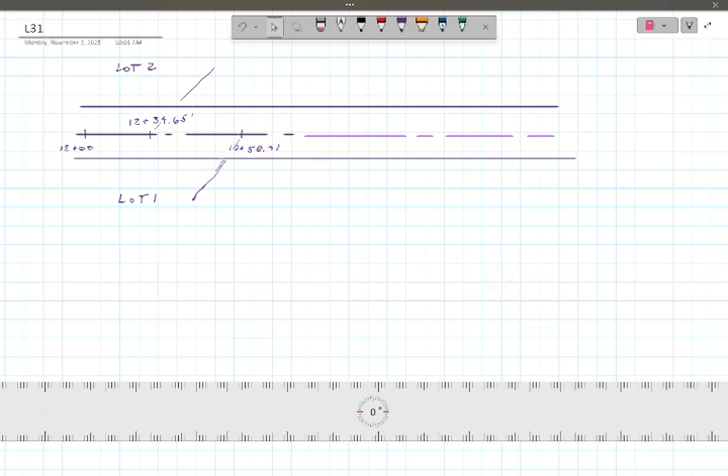Guess I can make that just a little bit bigger. Okay. And then somebody's going to shoot a point here. Where'd it go? This one is 12+34.65. Okay. And this one's going off in this direction, and this one's going off in this direction. This just happens to be lot 1. This one's lot 2, and so on down the way. And I do need to make some copies of that for you, and I will get some done. But generally, this is the building you're going to lay out. So we'll come back to the layout here in a minute. But we have this building that looks like so.

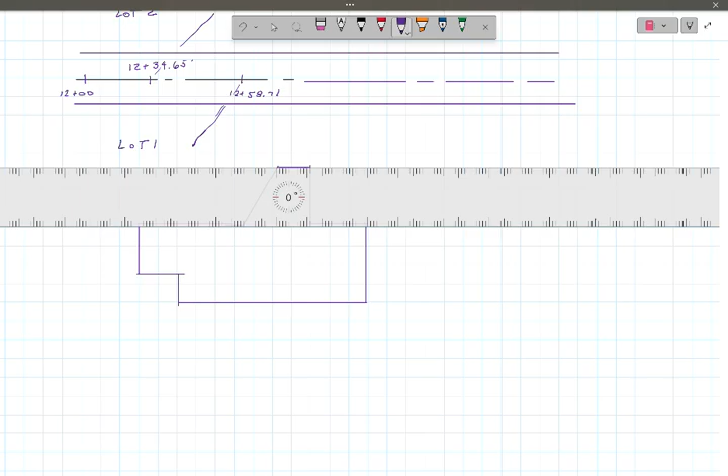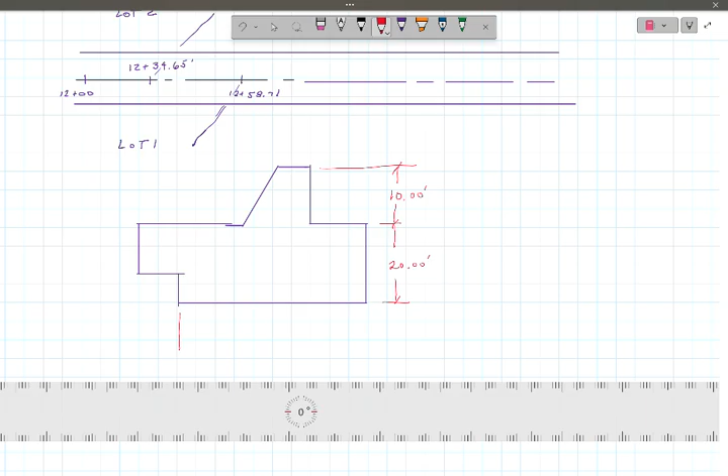Okay. So we got this building. I'll put the dimensions in red for you here. From this point to this point, 20 feet. I actually do it in surveying terms, 20.00 feet. From this one to here, 10.00 feet. Okay. Then we have 30.00 feet. And then we have 8 feet. Okay. Nope, sorry, this is 10 feet. Got my numbers wrong. This one here is 8 feet.

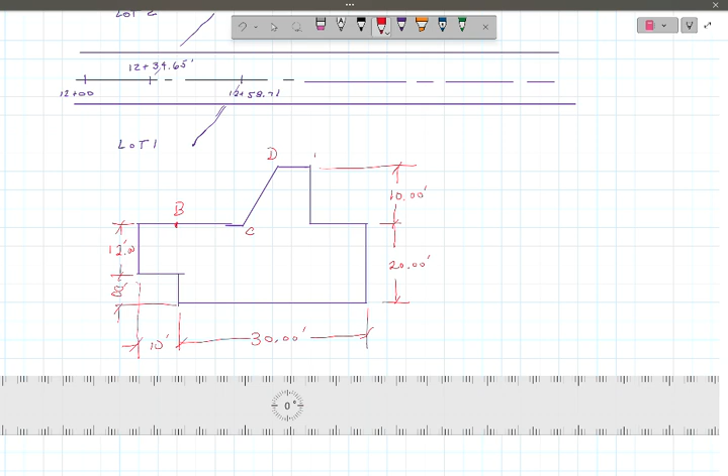And then we have 12.00 feet here. Okay. Then we got B located here. C, D, E, F, G, H, I, J, K, L. Okay. Now there's some really cool trig in here that you're going to have to do to get this all right. And that's what we get done today. I'll get you started. But by Wednesday, I want you to have them all laid out. I'll show you what I'm expecting.

What's that small angle under the 12, or not the angle, but like under the 12 on the left? Is that 8? Here? Yeah. 8. Yep. Okay.

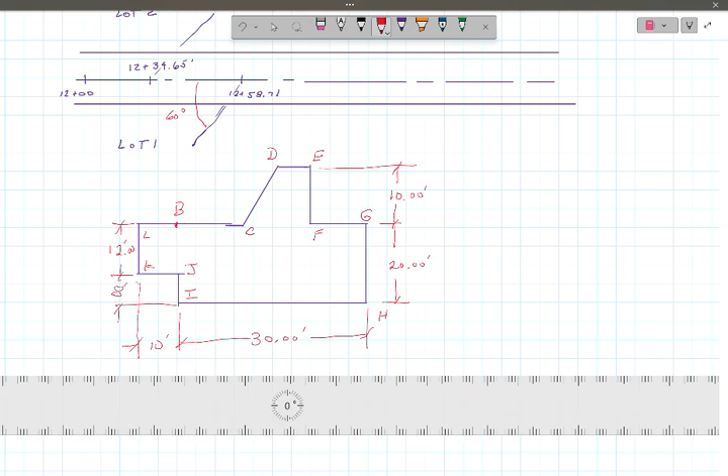All right, so here's the fun. The angle from our baseline to our road is going to be 60 degrees. Okay? If you're on the north side of it, your angle here will be 120 degrees. Okay?

Make sense? Okay. Well, each party is going to do one of the lots. So there are 6 lots you'll set up. You'll have 5 teams, so you'll do 5 lots and 5 parties. Okay?

You good, Josh? Yeah. Maybe you collapsed on me, Sierra. Oh, my nose was dripping. I'm a little sick, so I had to blow my nose. Just making sure you weren't on the floor, passed out with this monitoring.

So here's the fun part, okay? There are things you're going to have to get really good at doing the trig for. Okay? So for instance, I need to know the distance from D to E. Okay? I need to know B to C. Some of these I'm going to give you here in a minute. Okay? But the line distance from C to D, I don't know.

Can I figure it out? Luke's nodding his head slightly. How, Luke? That's where I was waiting for you to come in. Okay. You're just assuming that I'm telling you the truth then. Oh yeah. Cool. I love that.

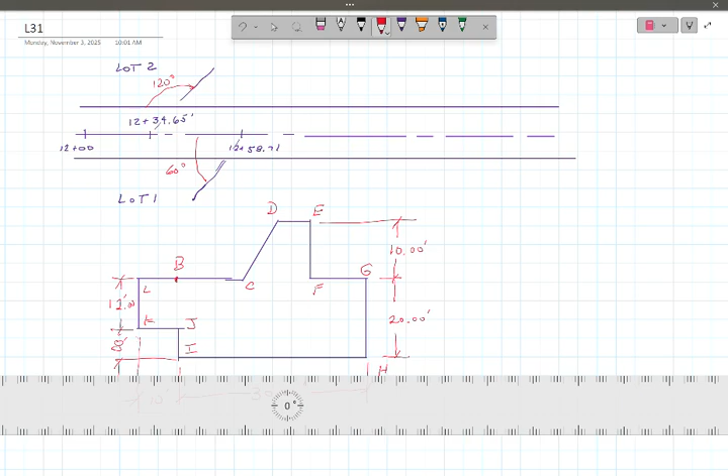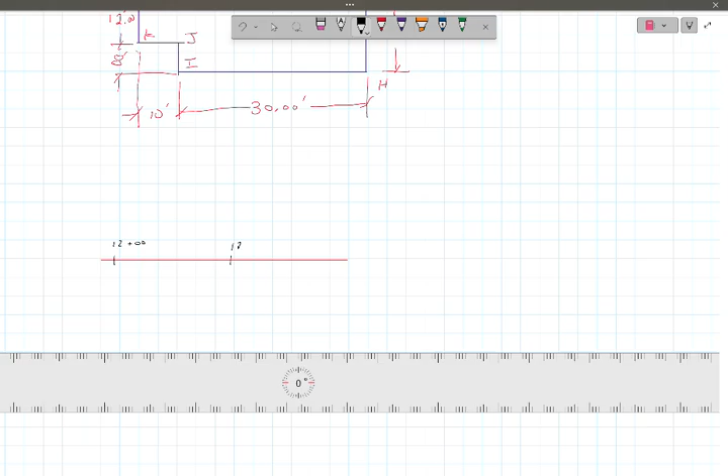Okay. So let me get the roadway back here for a minute. So we're going to put 12+00 on the road. Okay, you're going to measure over to 12 plus 58.71 if you're party number 1. Who's party 1? Okay. Can you handle that? By now, I'd hope so.

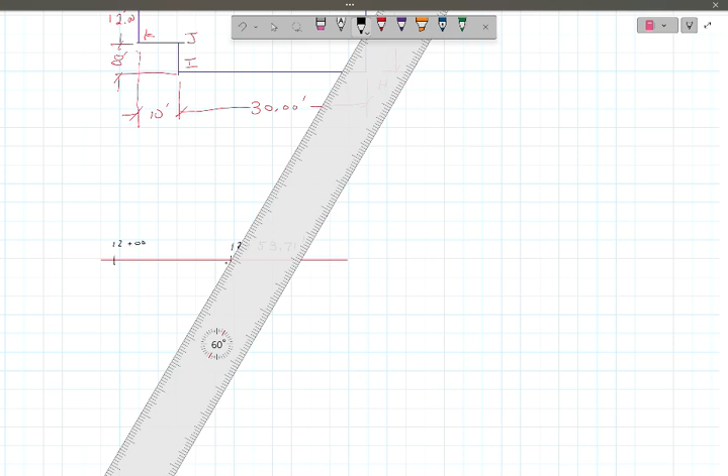You're going to go out and you're going to find that wherever you stuck 12 plus 00 on the road, there's a little pin there. You're going to measure straight back with a steel tape and get yourself offset by 58 feet and 7/10. Okay. All right, from there. From there, we're shooting, we want a 60-degree interior angle.

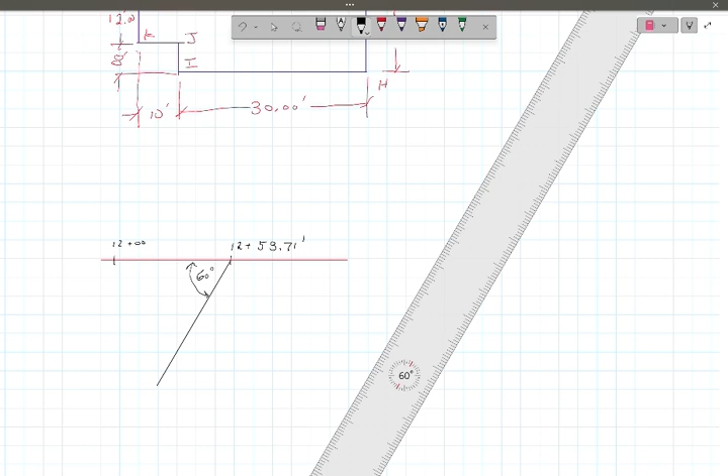Okay. It is the exact same thing. We're just getting a little more specific here. Okay. So I want you to remember, when you did the 60-degree internal angle, which way is the scope turned? Clockwise. I'm aiming here from 12 plus 58.71 to 12+00 to establish where the center line of the road is. What am I swinging? 300 degrees. Okay. But still 60 here, right?

Cool. Now, the building will sit down here. Okay. And this will be point B. So that's still 60 degrees. Remember your geometry from high school? 2 parallel lines with a bisecting line, all the interior angles are still equal to each other. Maybe that's not the way it was phrased, but roughly the meaning of it. Okay. In my world, it's still equal to each other.

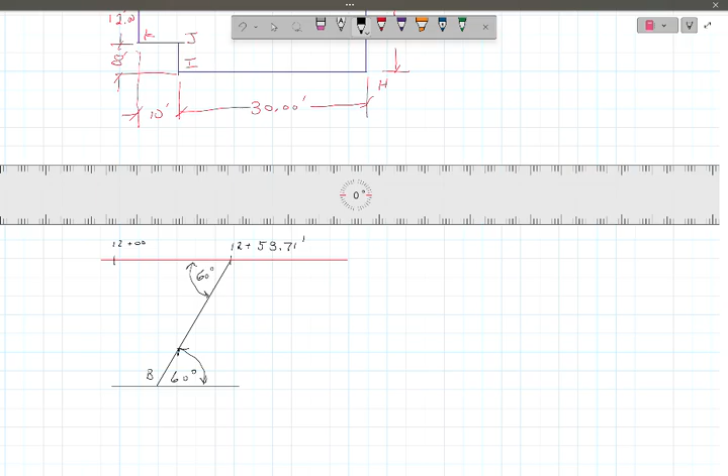Okay. But you're going to shoot from 12 plus 58.71 to B. And you're going to get an azimuth equal to 300 degrees, 0 minutes. And that is, I'm going to put it down as station B. Okay? And that'll get you off the roadway. All this little bit needs to be accomplished before 3 o'clock.

Seriously, come Thursday, 3 o'clock. What goes on up at the hill at 3 o'clock? You've heard me say it many times. Facilities leaves the campus, right out that access road. Okay? Don't want to get in their way. So, get your gear and get out of here.

Okay? Now, the other bit is this. So, you need a distance. So, from that point, all the offsets from the center line of the road are 35.80 feet. So it doesn't matter which party you are, you're going to establish that point. Yes? Is that like an odd number because it's a diagonal line instead of a straight offset? No, it's just a number that somebody picked years ago and we keep using.

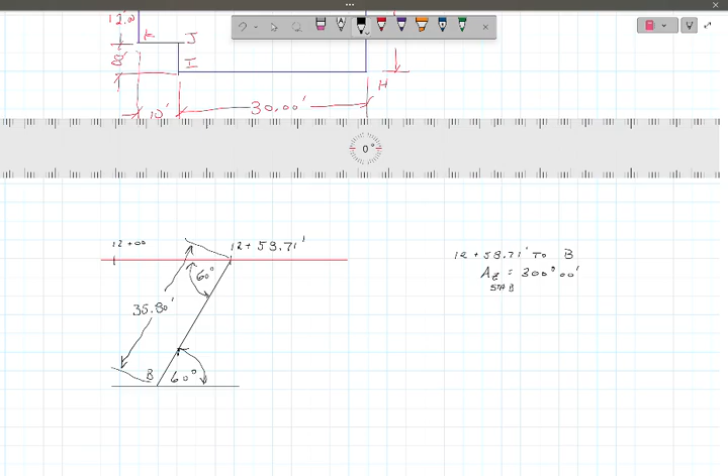With me so far? So we're going to back shoot to here. Pin's in the ground, we're good. And you're gonna back shoot to that pin. Then you're gonna zero, shoot 300 degrees here. That'll give you the 60-degree interior angle that you're looking for. You run a line or a tape out 35.8 feet on that line. Drop a stake at B. There's some little details we'll work on how to drop stakes properly out there. So that becomes our new site.

Now we're literally going to go move our instrument to B, because everything else after this is coming off B. But in order to establish B to A, and this was A up here by the way, I have to do a backsight to A. Set that as my 0. After that, 60 to this one will get me over to C. Step 1 complete. A is off the road. A is up here. Yeah, I should write A up here. A is your station that you're looking at here.

So if you wanted to, this is azimuth A to B is 300 degrees, given that this is your baseline, and that's established at 0 degrees, 0 minutes, 0 seconds. Now, there's a few games that we can play here. We could have put you on the point, find your magnetic north, create your azimuth at 0 there, and then swing. But it's easier if you know the line that you're going to be parallel to, to keep the front of the building parallel to the center of the road. Okay. Cool. Everybody good on that point?

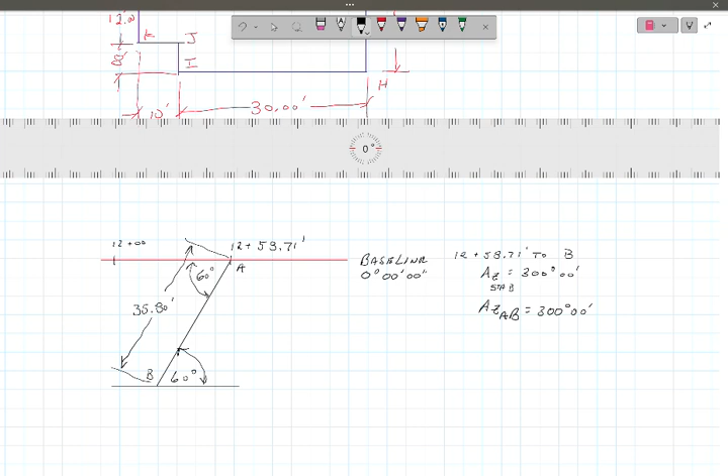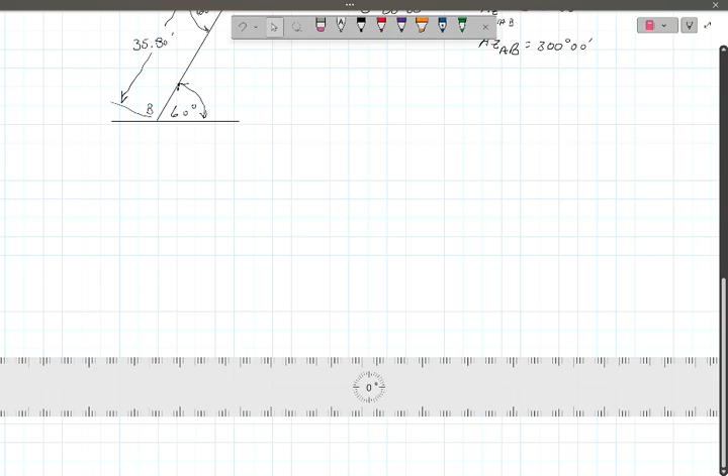All right. So that was basically establishing B to A. Now we have the next piece of this puzzle. Oh, and by the way, the azimuth B to A winds up being re-zeroed as your 0 now. And then everything else we're going to do after that comes from there. When you shoot 300, you're locking the horizontal on the total station. Are you moving the vertical so it touches the ground? Yeah, that's how you're just moving to that point. We're not looking at vertical angles or any of that stuff yet.

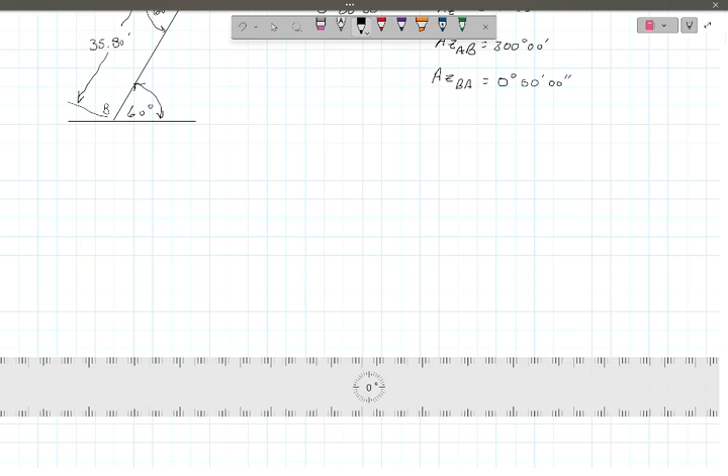Looking at the scope, put the crosshairs on the PK nail that's established out there. He'll have them put in the ground, and then there's white paint on them. And if the nails haven't moved from last year, they're still there. All right, now we got to look at how to get to the next measurement.

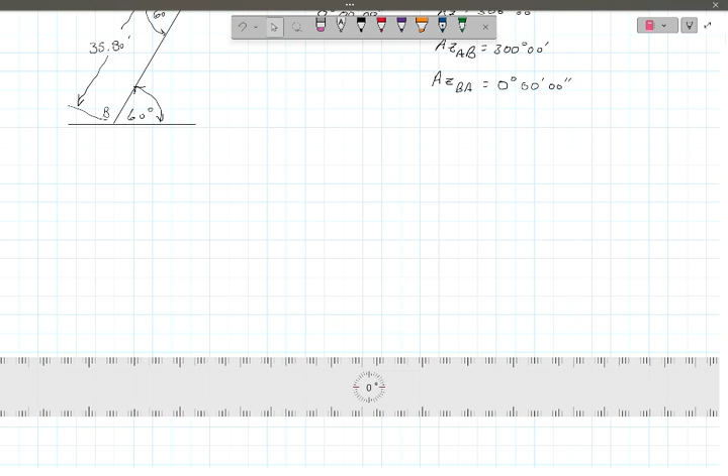Oh, question, yes. So this is all just group 1? This is group 1. You're going to do your own numbers here in a minute. So everybody's going to do them, except group 1 gets a head start. So each building's going to be different. Well, just more of the orientation. What's that?

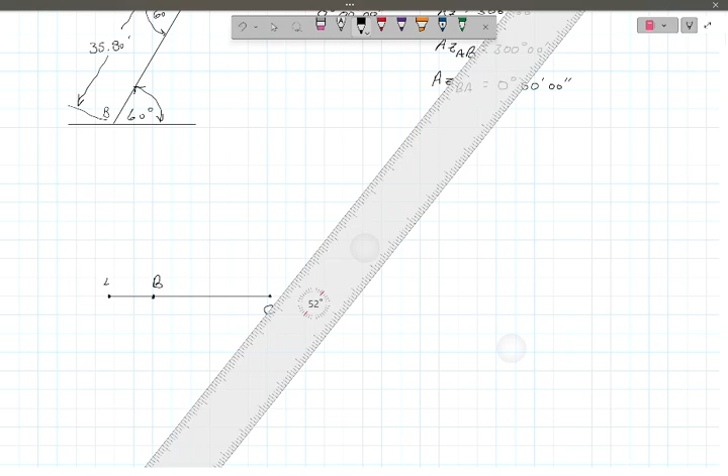Well, it just depends on what side of the road you're flipping on. Okay. All right, so follow along here. Our next piece of this puzzle is we need to establish... so we had B right here. That really sucks. B, and then we had C. Okay. And just behind us, we have L. Okay. So we run this clockwise, so we know the next angle is going to be, let me just draw this next shot in here, going in that direction, okay?

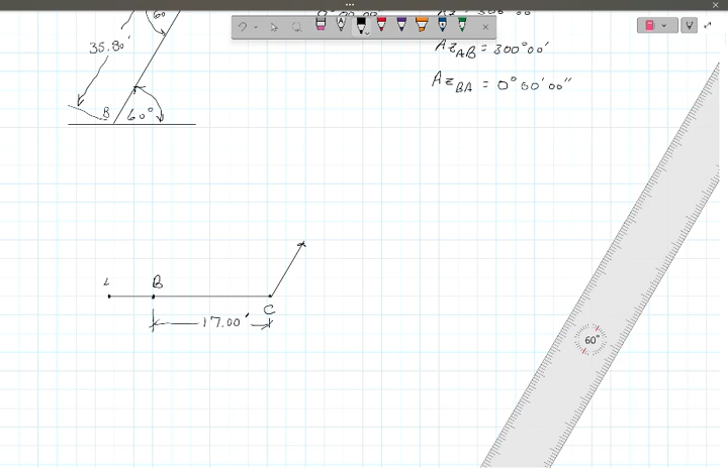But we have a distance from B to C of 17.00 feet. Okay. Now, where did it come from? Well, it came from the architect. I'm giving it to you because it's a lot easier than you guys trying to figure it out. Okay. The other bit over here, as long as we're having some fun, we also have point F over here, which has point E above it, and then we got point D somewhere in there. So as long as we're putting some measurements to life for you, this one is 27 feet. Okay. So keep that one in mind. Not really one I'm worried about right now.

Our next step, or intermediate step for this is we need to get B to C. Yes. F is 27 feet away from B. There you go. Oh, sorry, that's an E. Yes. Okay. Now, this step's easy. Is there a lot of math in this to go from B to C? Go ahead, Luke. No. Why not? You're right, but why not? Because it's a straight line. And I already swung. I've established I have a 60-degree interior angle to this, right? And I want B to C to be parallel to the station center line of the road.

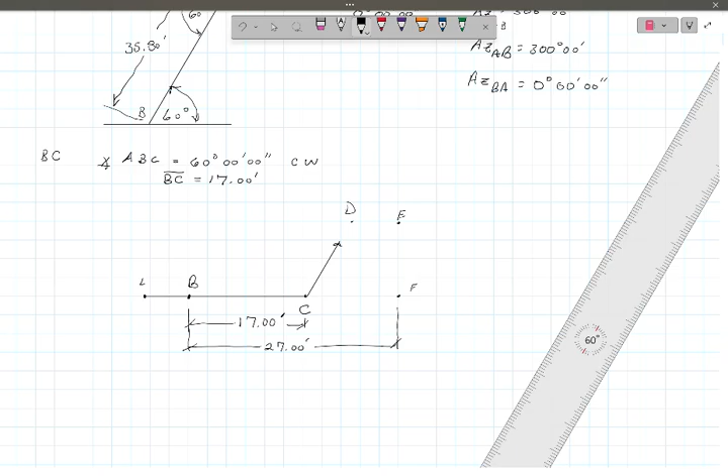You agree with him? Yeah. Only because you're not sure what the hell you're doing right now. No, shouldn't he agree with me since I said it first? Oh, you didn't say it loud enough. Be bold. Be proud. State it. If you're wrong, no one's ever gotten slaughtered around here for that. Okay? You're only wrong if you admit it. Oh yeah, there's a bad attitude.

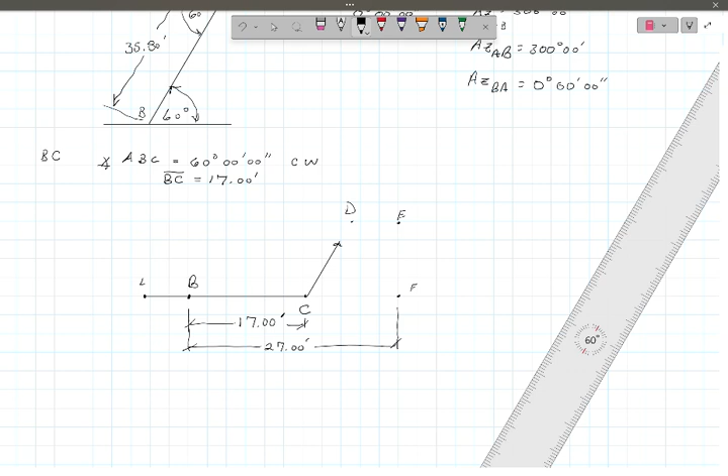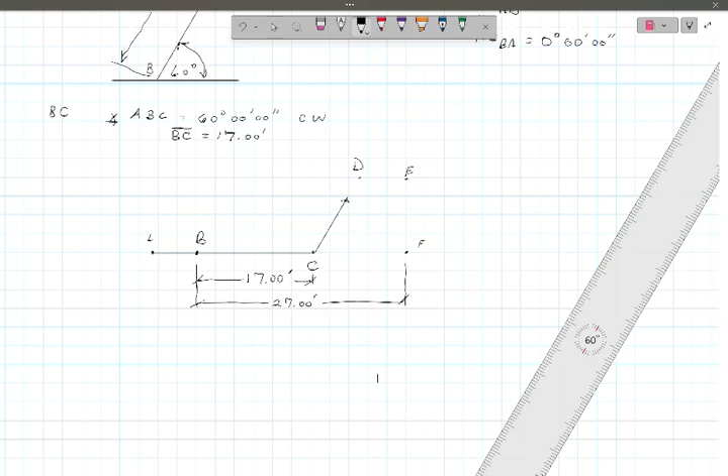Okay, so we got 10 here, right? So, what do I need to know to find? And this is going to be the interesting point. So I've established C. I want to know where D is. Okay? But I'm not moving my total station. All shots from here on after will reside from B. Okay? So I'm going to be shooting B to D as my line of sight. I need to know the angle for that. Okay? So let me do a little sketch here. And this is where the comp paper is going to come in handy for you. All right? So we're there. We're going up 60 degrees.

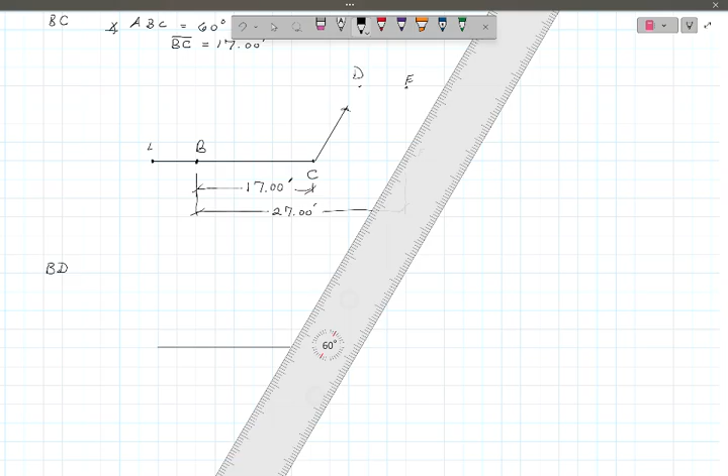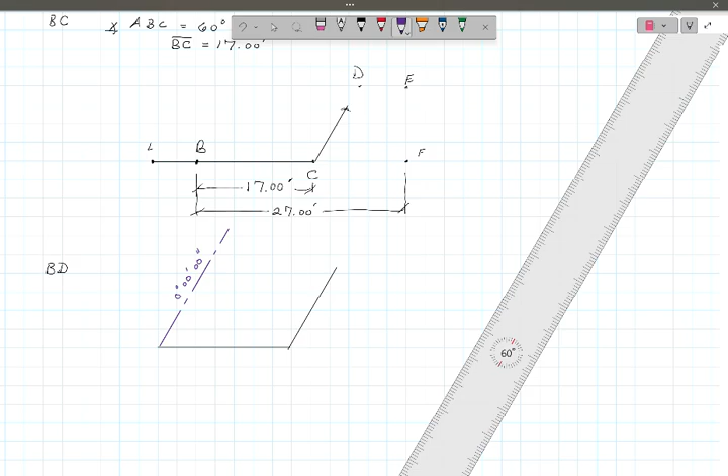Okay. And let's stay here at 60 degrees. Let's do this. Put in purple. I established this as 0 degrees, 0 minutes, 0 seconds. Okay? Right? What I really want is I want to know what angle I got to shoot for this. Here's B, here's C, there's D. Do we have some math that we can do to come up with that angle?

All right, so here's the process. And this does require you to sketch this out and have some fun with it. I'm just going to draw this kind of roughly here. If I do this, this, this, here, then I get a line down here. Here's C, here's D, here's E, here's F. I know this side to be 10.00 feet. I know this side here to be 10.00 feet. What's the other thing I know? Well, I know this interior angle is 60 degrees. Anybody see why I know that?

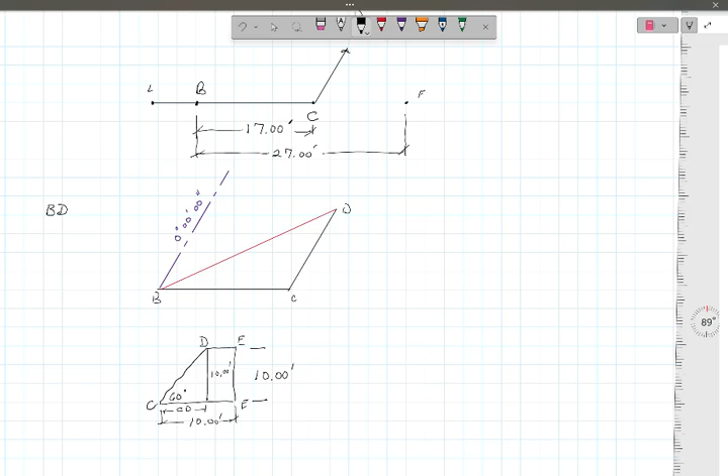Yeah. Okay. So, can I figure out what C to D is this way? I already know this is 10 feet this way. What I'd really like to know is this C to D, and let me make that just a little bit bigger here. I'm going to use this as D prime, because that is the distance I want to find out. How much further does that triangle go out? So I can drop the stake right there. Yes?

With me? But I'm not going to do it by coming over to C, going 10 feet, and then making a 3, 4, 5 triangle to come up and hit this at D. Can I check it that way? Absolutely. But here's the thing. I'm way back here at B. Why can't I just shoot an angle to here and figure out the distance I got to go? What kind of triangle do I have if you picture that? Take you back to this picture up here. What kind of triangle is triangle BCD?

Obtuse. Can we do obtuse angles? Yeah. What do we need to know? Law of sines, law of cosines. One of the two, depends what you know for data. Yes, Landon. If you extended the C, like how you have it drawn so it's square, can you just do sine 10? Oh, you could, and we're going to. We got to do things to get this, okay?

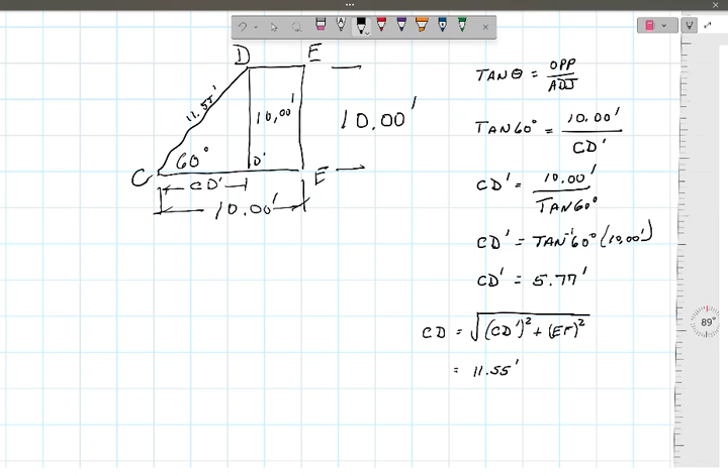Now, what if I want to know what CD is itself? What's the way to do CD? Do the Pythagorean theorem. So I'm literally looking for the hypotenuse. CD is equal to the square root of CD prime squared plus, you can call it EF, squared, because that's 10 feet. So when you get all done doing this little bit of math, you should find out that CD is equal to 11.55 feet. Cool. So far, so good? Anybody lost? All right.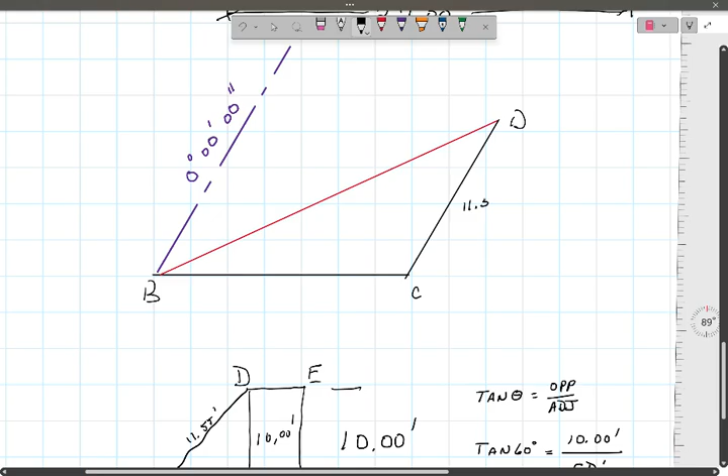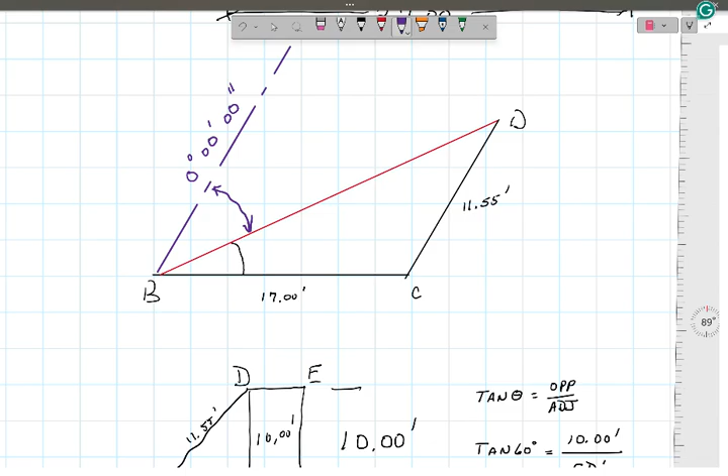That means this is 11.55 feet. We know this is 17.00 feet. I am really interested in this angle in here from the trig standpoint, but the angle I really want the total station to shoot for me is this one. So far, so good? So, let's draw the B, C, D, 11.55, 17.0 here. I'm looking for this angle. What did I call it? I don't know if I called it anything.

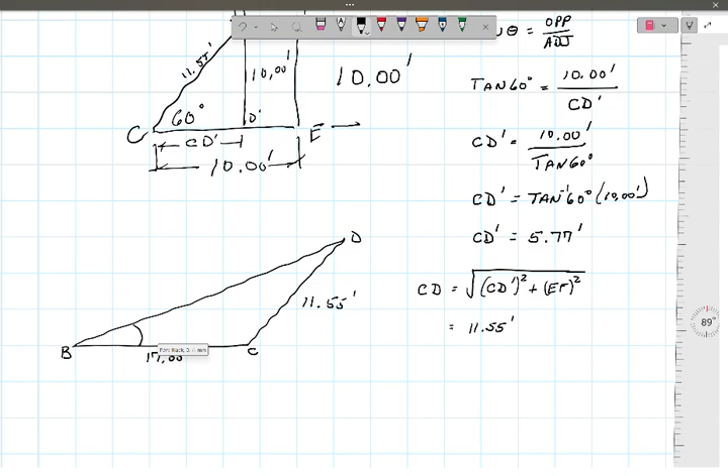So I'm looking for this one. But I know this one, don't I? Because I know this is 60 degrees here. This makes this 120. Okay? So literally, I'm looking for BD: C squared equals A squared plus B squared minus 2AB cosine C, okay? Or in terms of, well, this is 60 in here. Interior angle from here was 60 degrees. So 60 back to BC would be 120.

Isn't the angle B 60 because it's parallel? No. But it's 60 degrees from the road this way. So the road... Oh, was up here. I got it now. Never mind. Okay. That's my 0 for my instrument. Okay. All right. So once you get all these numbers, let's get equal signs lined up, 3 lines.

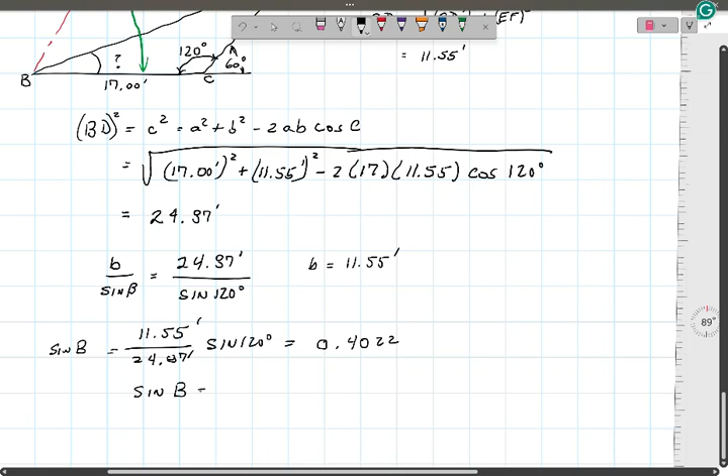And I'm going to get what the sine of B is. Mathematically makes sense to everybody? 0.4022. And if I reduce that equation down, and I am doing this the hard way just to make sure you're all seeing the math. If I take B and I do the arc sine of 0.4022, I'm going to get B to be 23.715 degrees, and I think the 5 repeats a couple times.

But once we get down to H, can we zero in at G and then spin, or do we always have to go back to that benchmark? Always got your zero unless you change it on your total station. It will be back between B and A. Everything will come off that measurement. Cool thing is you don't actually have to go back and shoot somebody standing on the road to do it again. Just gotta get your instrument back there. As long as you keep me and Mr. Ryder and any other fat feet from kicking the tripod, you're good. Now hold on, let me finish this up real quick.

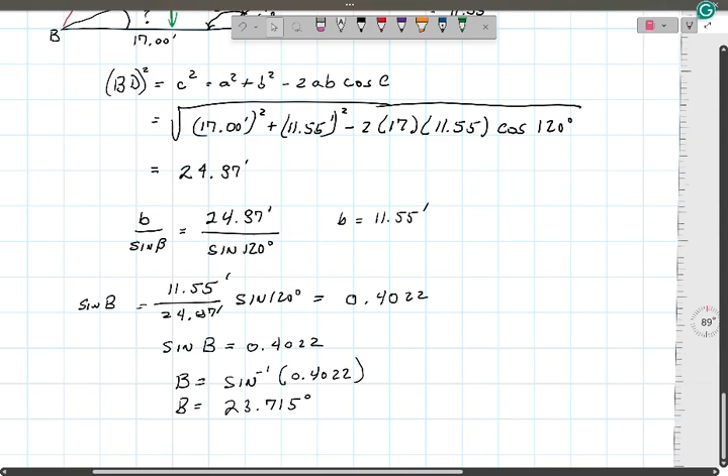Okay, so we know we got 60 degrees, minus the 23.715 degrees. So we need an angle of 36.28 degrees from our azimuth B to A, which when converted will be, I lost the number. Convert that to degrees, minutes, and seconds: 36 degrees, 17 minutes, 4.27 seconds. Okay, let me go up one more step here and I'll answer your question, Landon. So far, so good?

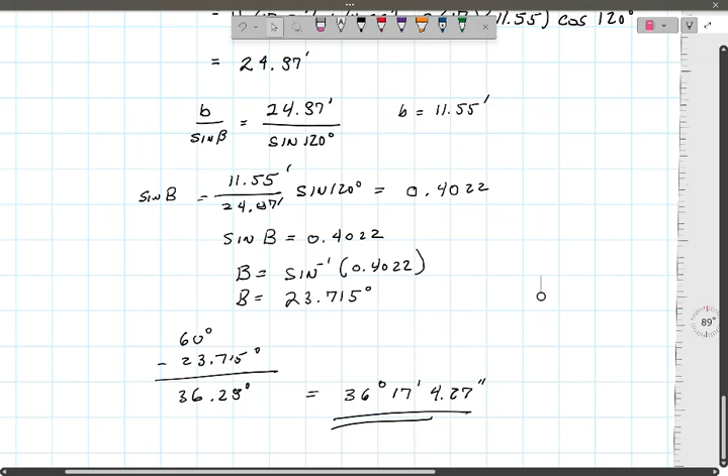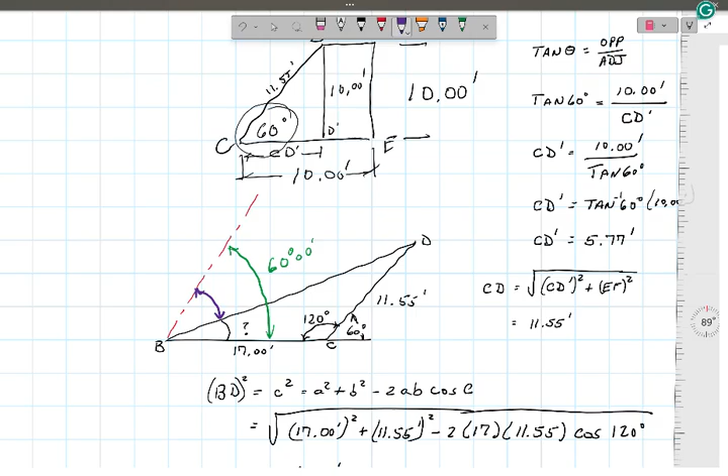So when I'm all said and done, I want this angle in here to be 36 degrees, 17 minutes, 4.27 seconds. This B to D distance here will be the 24.87 feet. And that's the work you're going to do for every one of these shots to every one of those stakes. And then you can have yourself some checks because it's as simple as pulling diagonals to see whether or not you have things laid out correctly. So you can figure it out.

Now, I want you to do the work by hand, but you could put this thing in AutoCAD, right? I'll take AutoCAD. Now, we gotta get you caught up. I know it's your first advising appointments this week. But you can do it all by hand. What's your question? I figured it out. Okay.

Any questions? Okay. We'll work on this again on Wednesday. But I want you to do some work ahead of time. Get your stuff calculated. That's your homework. I want to see what you've done. If I see it, the grade's 100 for that homework assignment, even if the numbers are wrong, at least you tried to do the work. Like all of it, or just starts? Yeah, we're going to check them on Wednesday so that I can then have you get your field books and fill them out. If I do AutoCAD, that's good? Still got to do all the hand calculations.

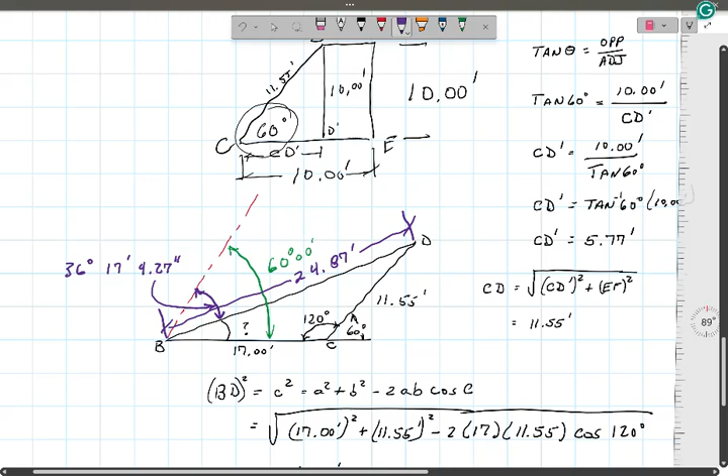My birthday's on Thursday. I don't really want to do this. Can I just get out of it? No. Your birthday's on Thursday? Yeah. We will bring a birthday cake out.